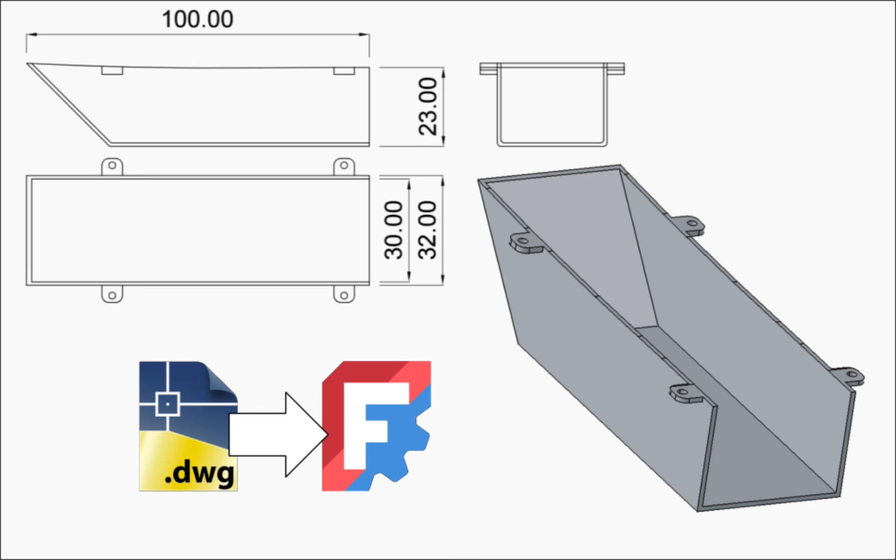You'll notice I haven't used attachment, only placement. I haven't even attached to the base planes of the body. It's advisable to use attachment, so you can reference the body's origin planes rather than faces of other geometry when using operations like patterning. But this is a quick way to get from a flat 2D imported file to a 3D print.

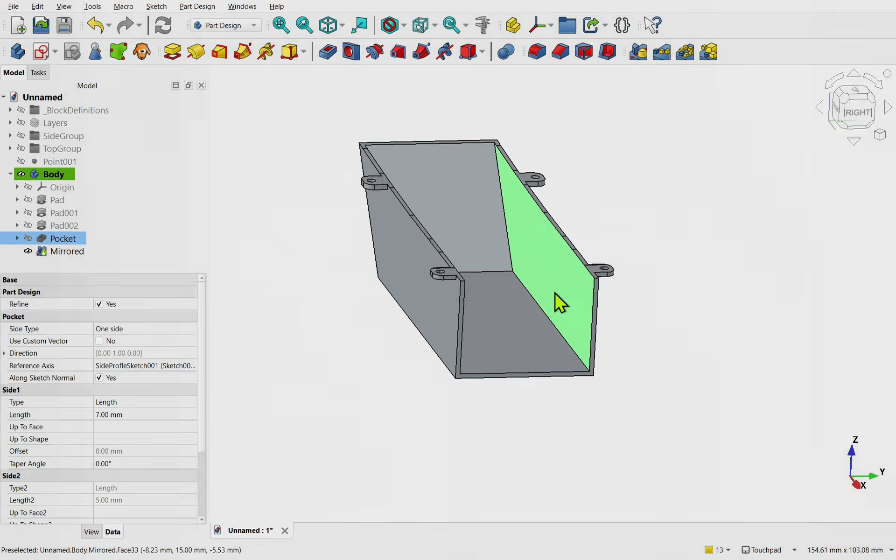Our design intent is to create a servo cover with the following dimensions using the supplied DWG file. We could create the shape from scratch using a sketch, but the curvature of the top closely matches the wing's profile that the servo is going to be attached to. Because of this, and as an exercise, I'm going to use the existing geometry from the DWG file.

First, we need to set up FreeCAD to allow DWG file imports. You can follow the instructions from the previous video or by following the link below. Once that's done, we go into FreeCAD and open a new document.

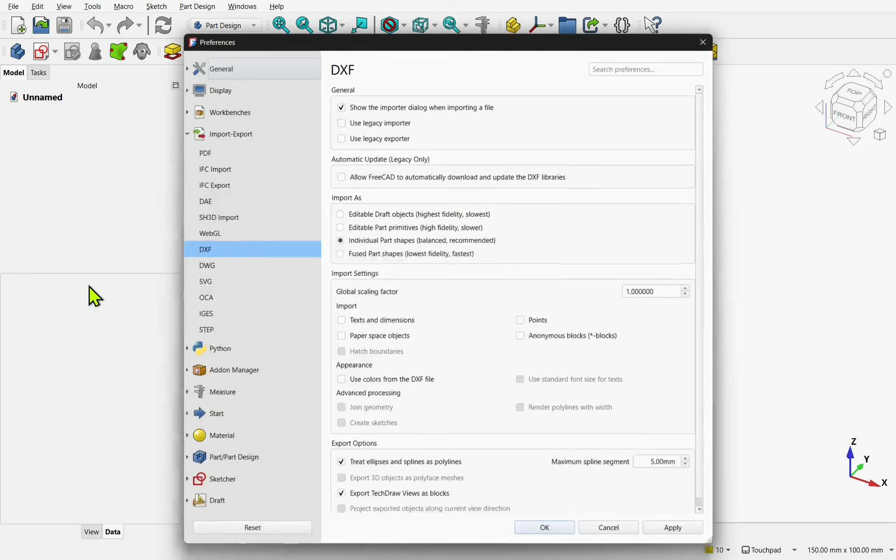To start with, it doesn't matter which workbench we're in. We're going to import the DWG file using File and Import. But it's best first to check our preferences: Edit, Preferences, and look at Import Export and the DWG settings. We've got our path and the DXF, and we're looking at the scaling factor. Mine's set to 1 at the moment. We don't know what scale this file is in.

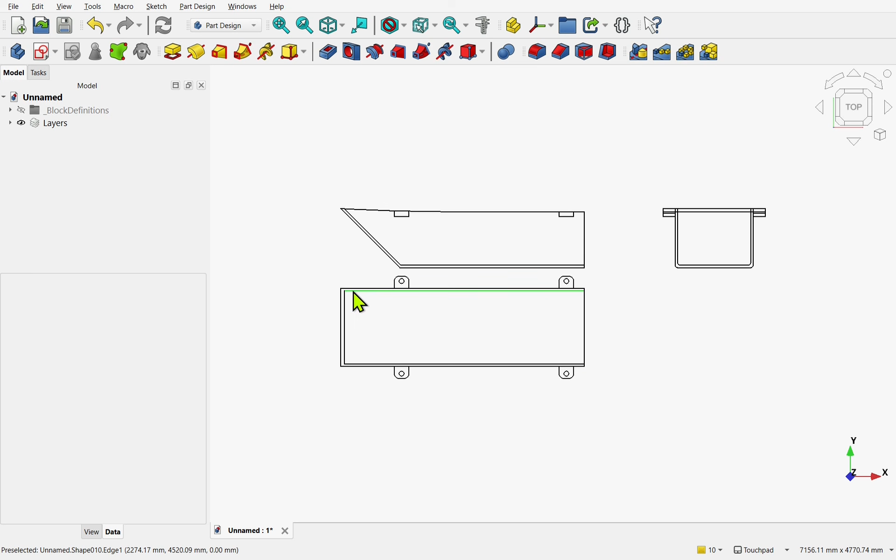Let's come up to File, Import, and pick the DWG file and hit Open. Let's set the defaults and look from the top view. I want to take a measurement off this top line. Check the scale: select the top line and use the measuring tool. Our measurements come in and we'll save that and close. So in our measurements, we've got the length here, and we'll use this value to calculate our scaling.

Calculate the scale factor: take the desired size and divide it by the current size. In our case, we'll take the desired 100mm and divide it by the current 2540.09mm, which will give us the following approximate scale factor.

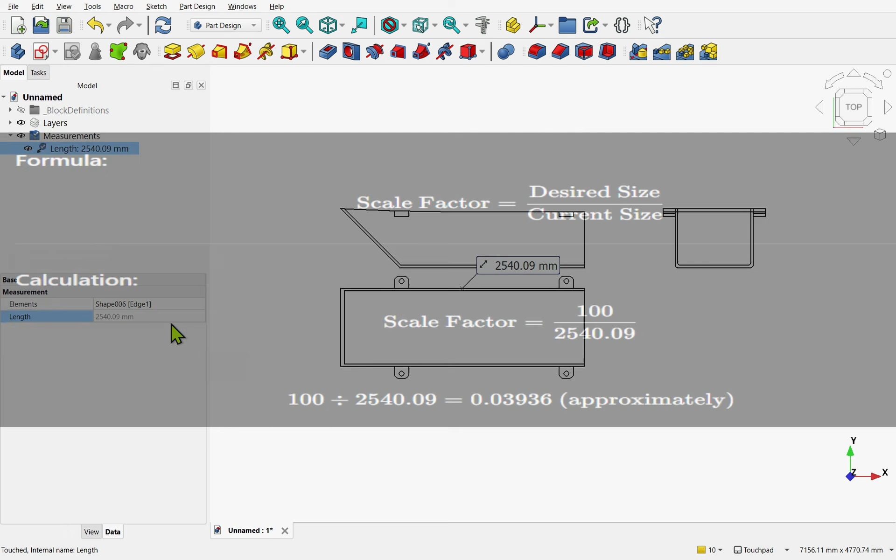Let's close the document as we don't need it anymore. Discard and come up to Edit, Preferences. Look down and find Import Export and DXF. Look at the global scaling factor, and we'll change that to the scaling we need. Then hit OK, and now create a new document.

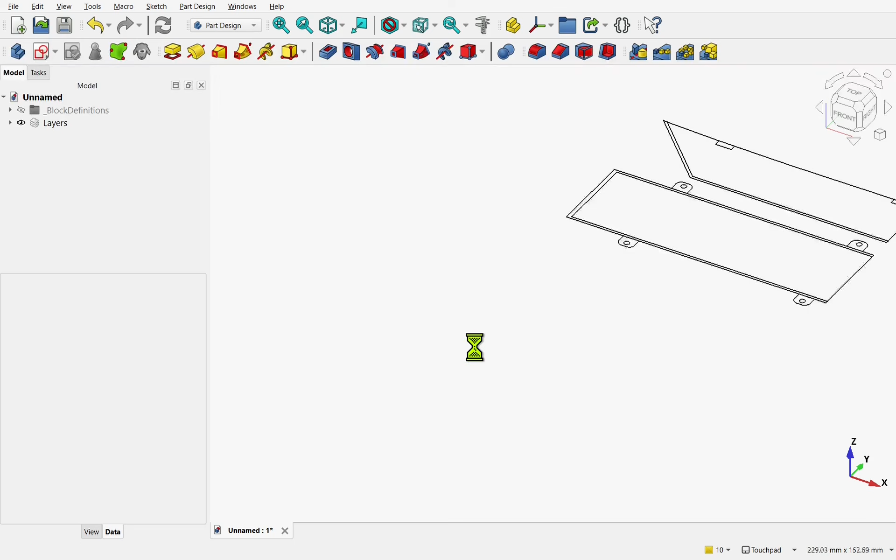Go up to File, Import, and pick the DWG file, and hit OK. Look from the top again, zoom in, and take the top line and measure it. We can see that it's 100mm. You may get an approximation, off by fractions of millimeters, but this is sufficient for your needs.

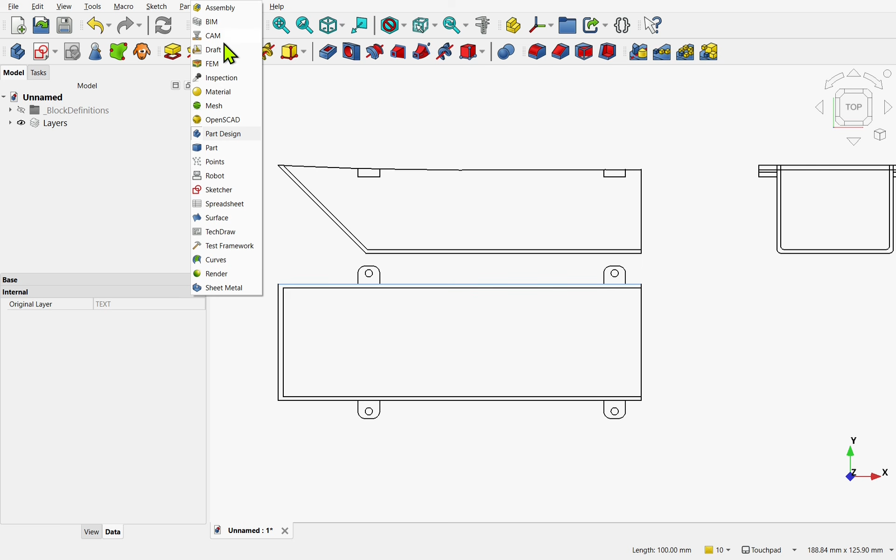Let's close out the measuring tool and come over to the draft workbench, where we'll prepare our geometry ready for the part design. Now we can examine the model to see what we have.

From the top projection, we can see it's a hollow shape with an open back. The side projection shows the curved top that we have to maintain. This is going to be part of the wall, and we see it has a closed front. Tabs are extruded downwards from the top.

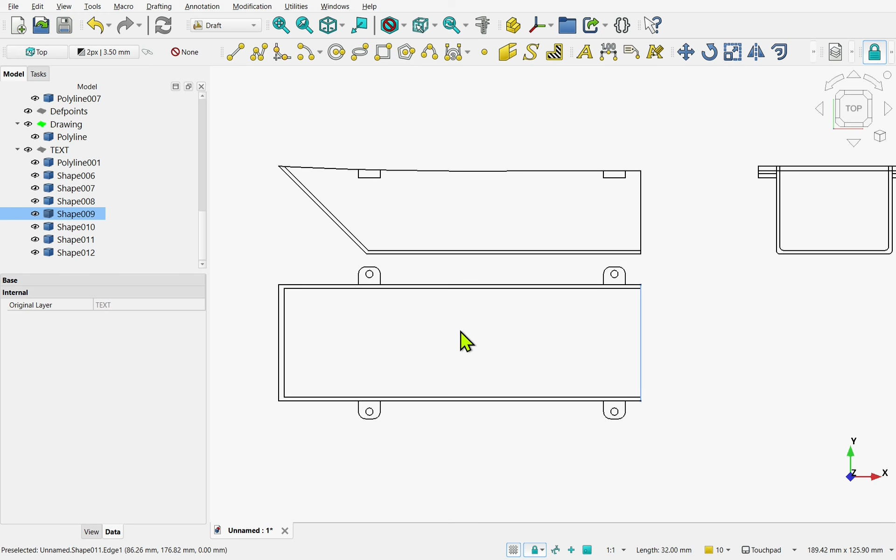From these projections, we can make a number of profiles. Let's come over to the left and see what we have. In the layers, we have a number of groups, and in here we can see a number of shapes that are part of the back view. In the others, we can see a polyline, and in text we have a number of shapes that are the top projection. We've even got a polyline in the side projection, so these are a bit jumbled.

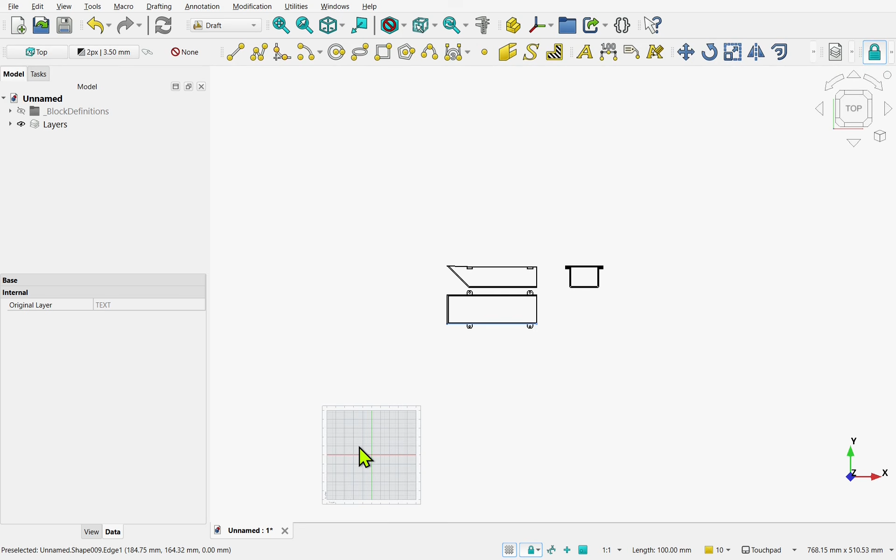What we'll do is simplify these using the draft workbench and its upgrade tools. I'm looking to upgrade these to groups of wires. We're working along the XY plane, so make sure our working plane is set. If it's not, make sure nothing's selected. Come up to Utilities and Working Plane and just set it to the top XY view.

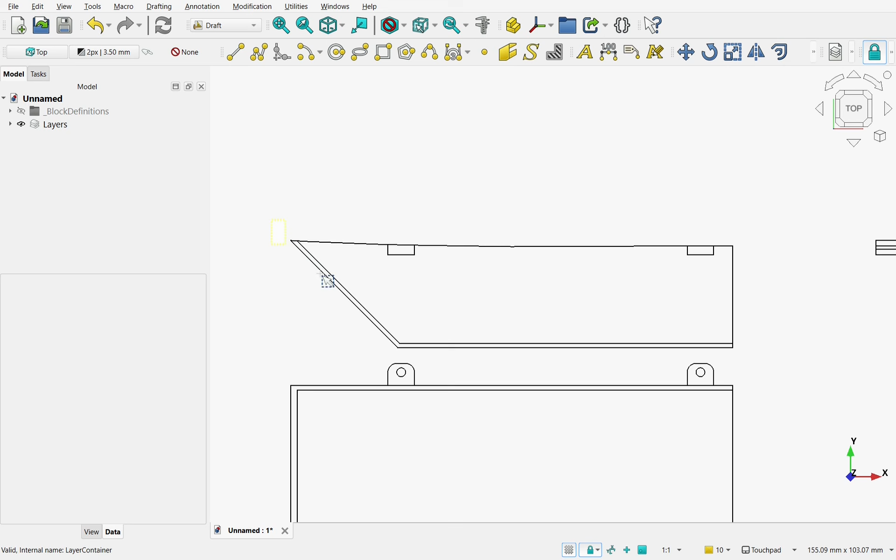Let's zoom in and first select the top line of the side profile, select once and then select again, and you can see how much is selected. So this has selected the whole line. I'm going to select all of this: come up to Edit, Box Selection, and draw a box like a rubber band around the geometry.

Let's upgrade this: come up to Modifications and Upgrade. And if we look to the left, we have a number of wires, so these are all the wires of that projection.

Let's create a group. We're looking for this icon, the group, New Group, click that, and we get a group. Now I can select the first wire, shift-select the last one to select them all, and drag the wires into the group.

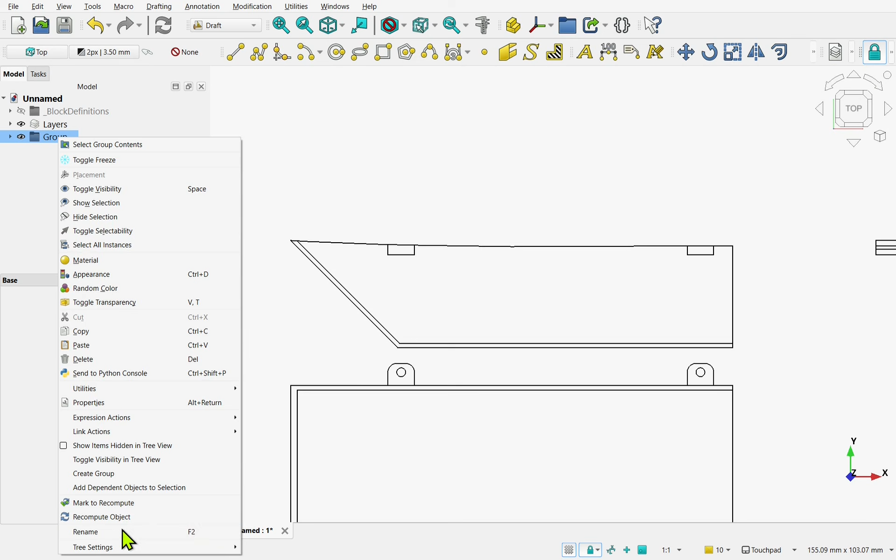This is our first group, and I'm going to call that side group. Let's create another group. This is going to be our top group. Hit enter, and we repeat the process for the top group.

Let's zoom in. Edit, box selection or shift B, then select rubber band select geometry. Up to modifications and upgrade, we get our wires, they're already selected. So we can hold down the mouse over wire 004 and drop it into the top group.

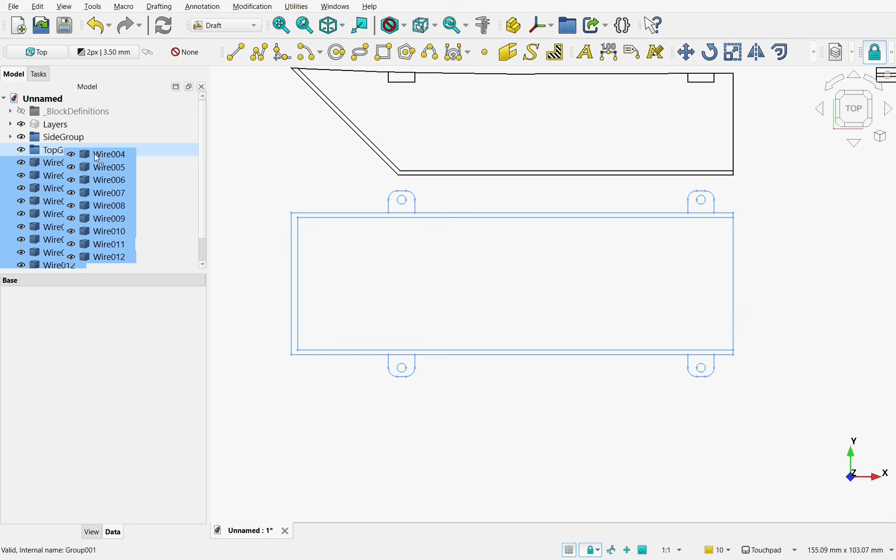I'm not worried about the back view, this one here. Let's hide the layers. Now we've got the groups, we can move this into position. So our origin, come up to view and toggle axis cross, is here.

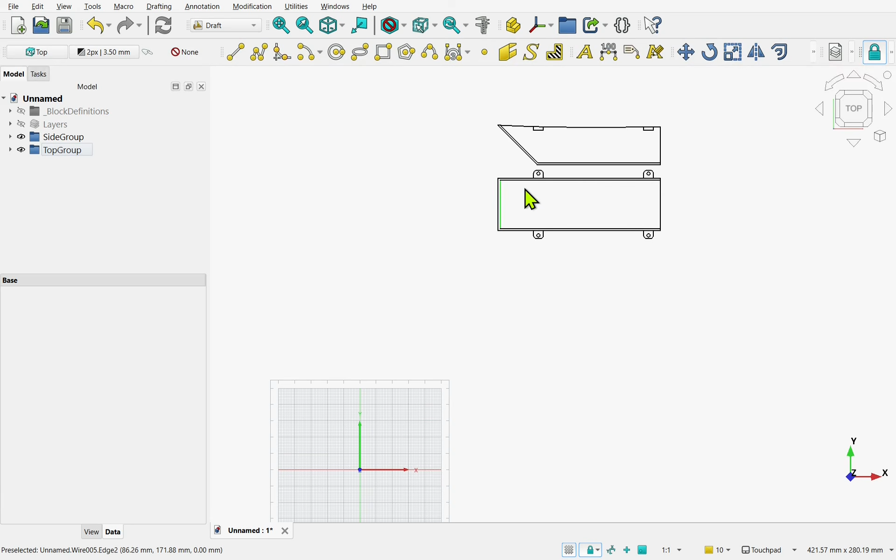This is the world origin. I'm going to move the top group over the world origin. To do that, we can select the top group and then come up to modifications and move.

Our snapping should be on, so not grayed out. We can pick the snap option by long clicking the left mouse button on the icon and selecting which ones we want. So we've got snap lock, snap endpoints, snap midpoints. I'm going to check that one. Also available up the top, and we've got them all here.

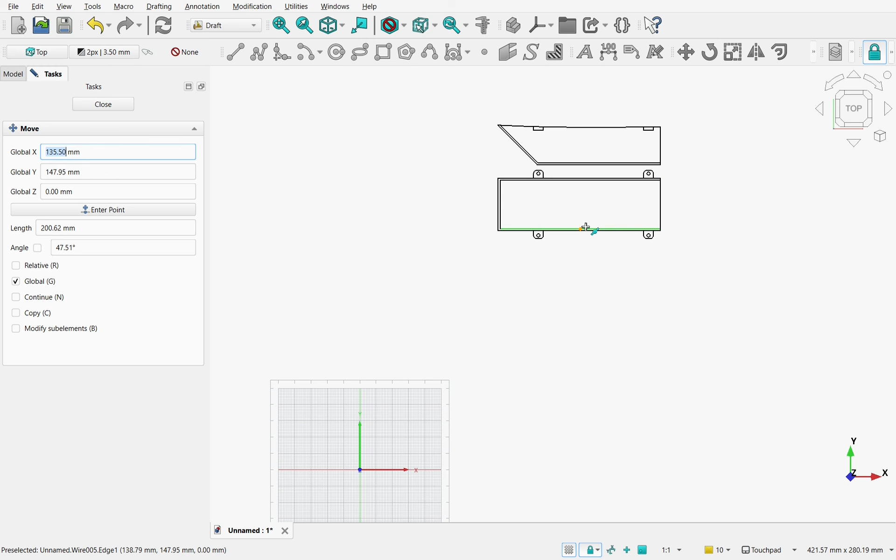This means if I hover over this object, you can see the snapping starts to appear. So we're snapping to the center, the horizontal edge here. As we pick the group, we're going to move the group. So I'm just going to select that point here, click once, then move the mouse and center it roughly over the origin.

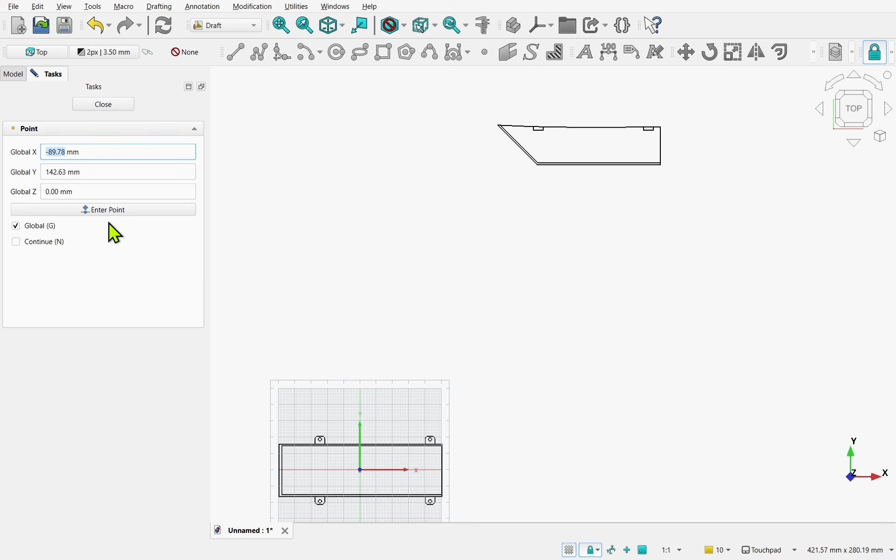Now, if you want this perfectly centered, we can add some geometry to snap to. Let's use a point. Select that, and we've got global X, Y, Z here. We'll zero all these out. Type in 0 on the keyboard, press tab, and then enter point. We've got a point at 0, 0, 0, so the center here. We zoom in

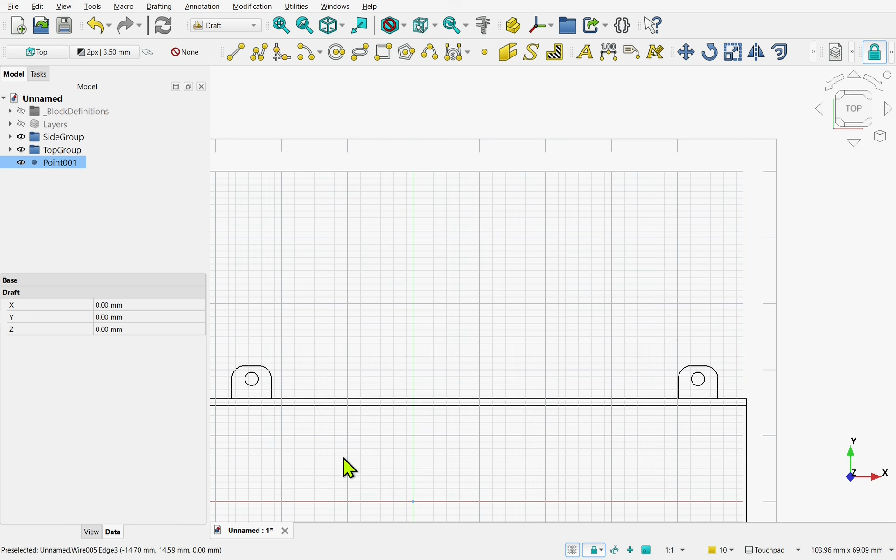and click. Let's come up to view and toggle axis cross. We should see a point here. So there's a point just here.

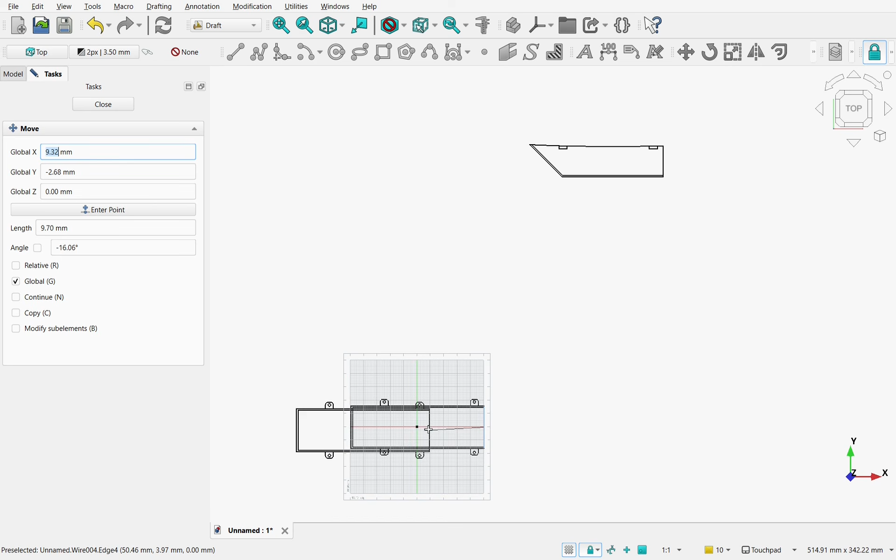With that, we can snap geometry too. So if I click on the group, top group, and use the move tool and pick, say, a snap to the center here, I can snap to that point. You can see, snapping to that point, and we can center it. So we've got the top group.

Let's do the same with the side group. Pick the side group, let's zoom out slightly. Modifications and move, or use the move tool from the toolbar. And the way I want to attach this is to attach it at this point here.

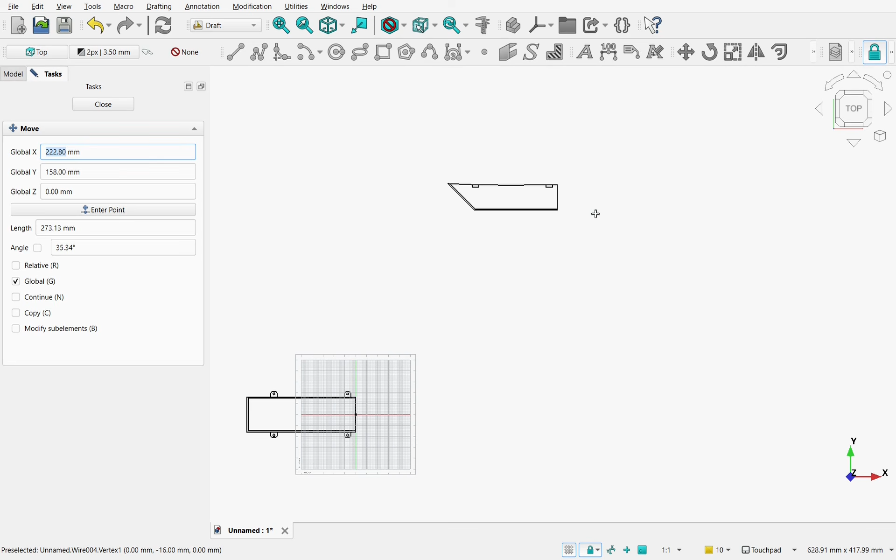And it's going to pivot from this point downwards. So that's select top right point. Click once, it's mobile. Let's zoom in and hover over this vertex here, this point. Get snap to endpoint, click again, and that's in position.

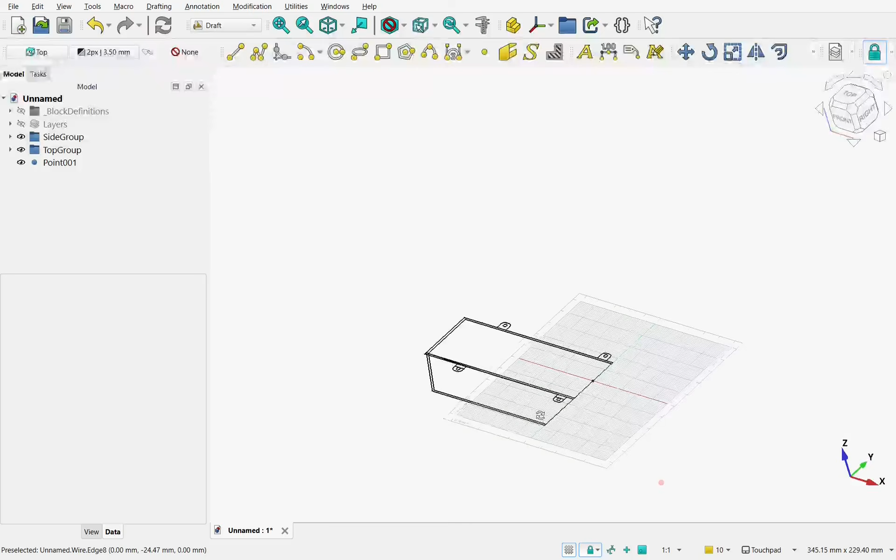So we've positioned along the XY. Our next positioning is along the YZ plane. So we need to rotate our side group. So select the side group. This time we'll come up to modifications, rotate, and it's the same process.

We need to select a point, and this is the point that's going to be rotated from. It's going to be this point here. Hover over that, we can see the snap endpoint. Click once, we get a line. This is where we're going to drag geometry from, and we'll drag it from this point.

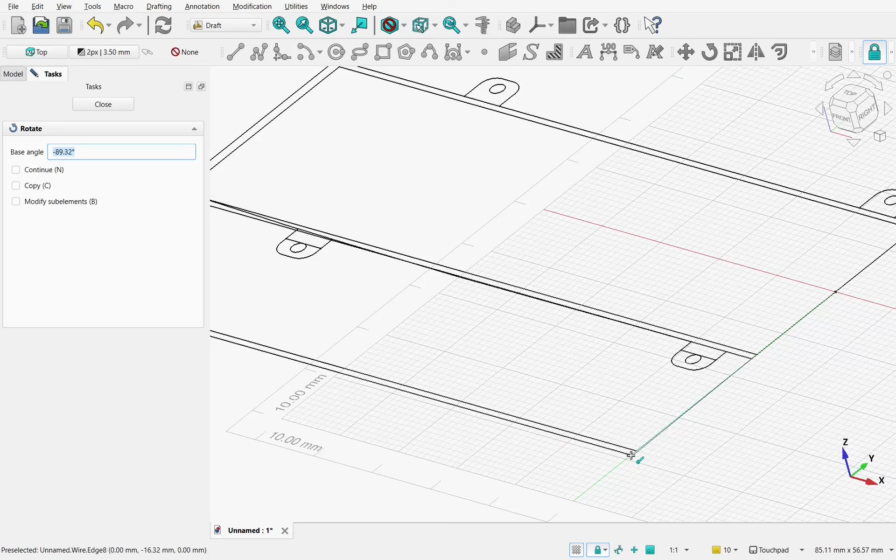Now, one thing that we haven't done is set the plane, so you can see I'm moving along the wrong plane. I'm going to hit escape to cancel. Make sure nothing's selected. Up to utilities, and working plane. We're set to the YZ plane, the side plane.

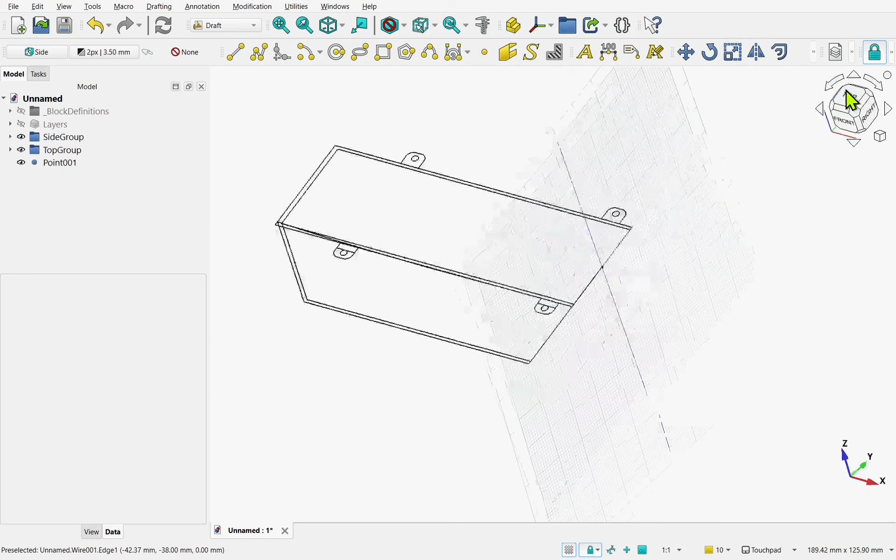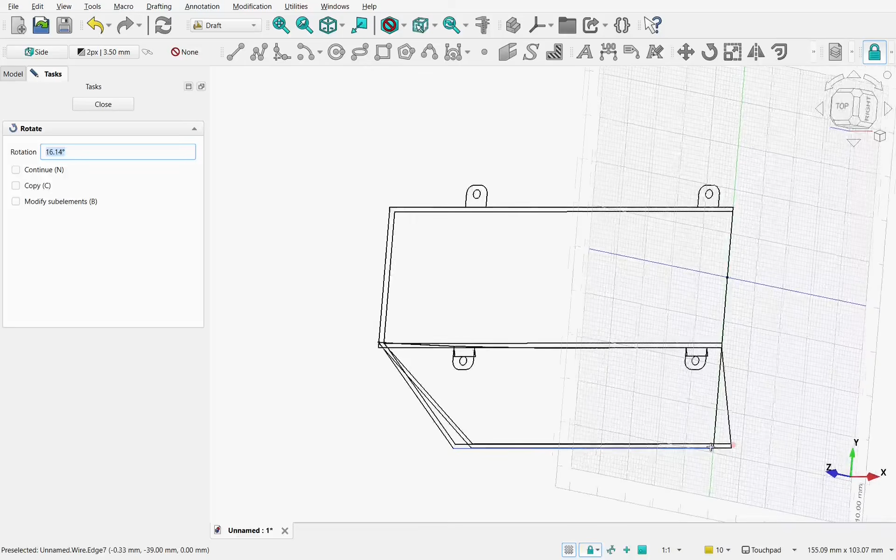So now we can look from the top and we see the plane has moved. Place a little bit of angle, select the side group, use the rotate tool, select the first point, going to be this point here. Select the next point that's going to be dragged from, and then we can rotate our 3D view. Let's rotate it around this way.

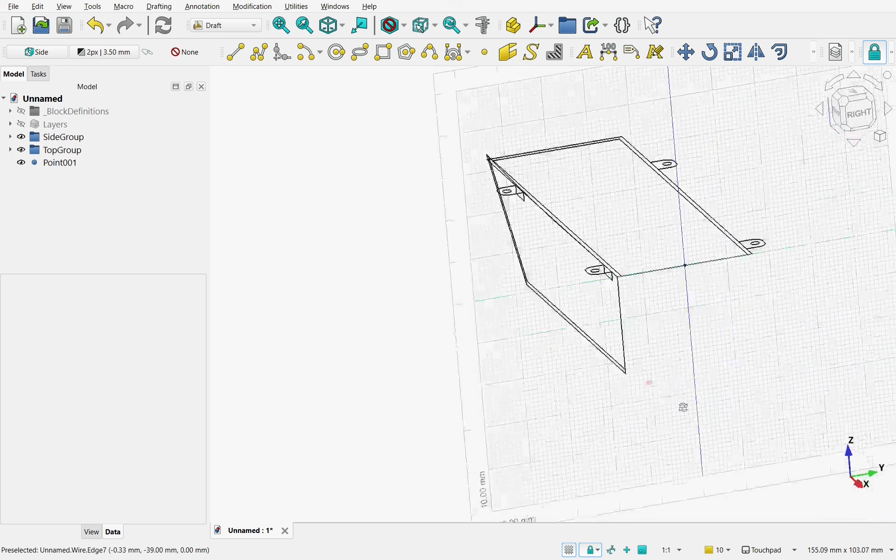Sometimes you can get yourself quite disoriented. Let's come around here, always look at your Y and Z, make sure we're rotated correctly, and look at the rotation, rotating downwards. We need to type in 90 degrees on the keyboard, and you see on the left it's entered into the field, and hit enter. So now we've positioned both the top and side projections, ready to utilize them in the part design.

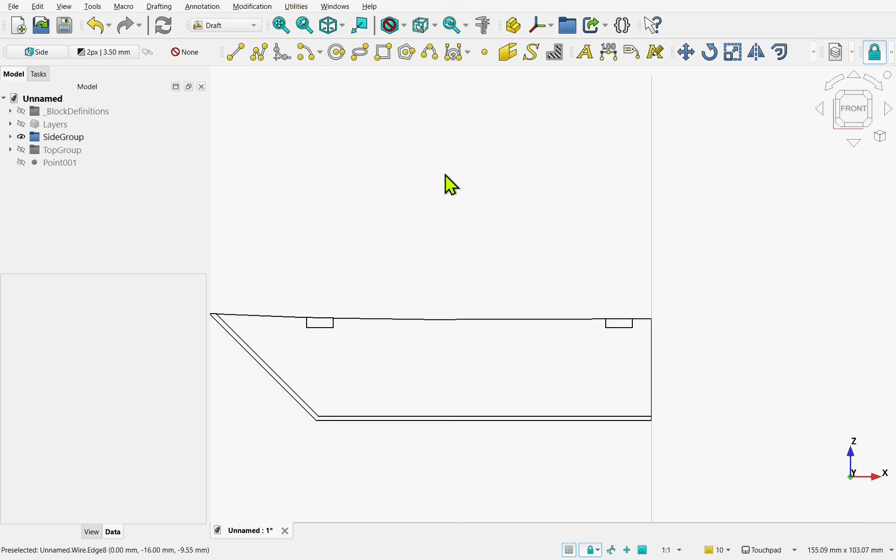Before we go ahead and use these in the part design, we first need to make a number of sketches. I'm going to hide the top group and also the point. If we look at the front from the side group and change our working plane, ensure nothing's selected, go to Utilities, Working Plane, and set it to the XZ plane. We can now work on the side geometry.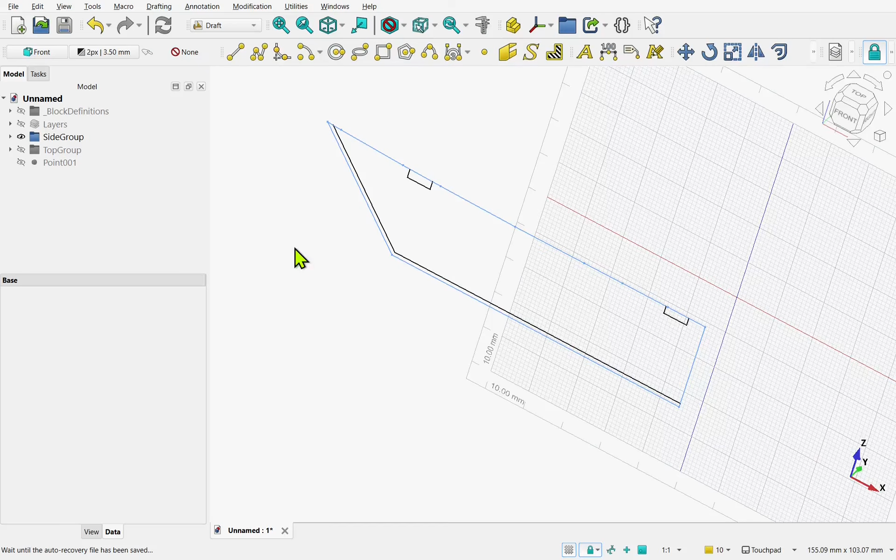So we first need to create an extrusion of this geometry here, and we'll come up to modifications and draft to sketch. We created a sketch and we'll rename that to side profile sketch. We'll just hide the sketch.

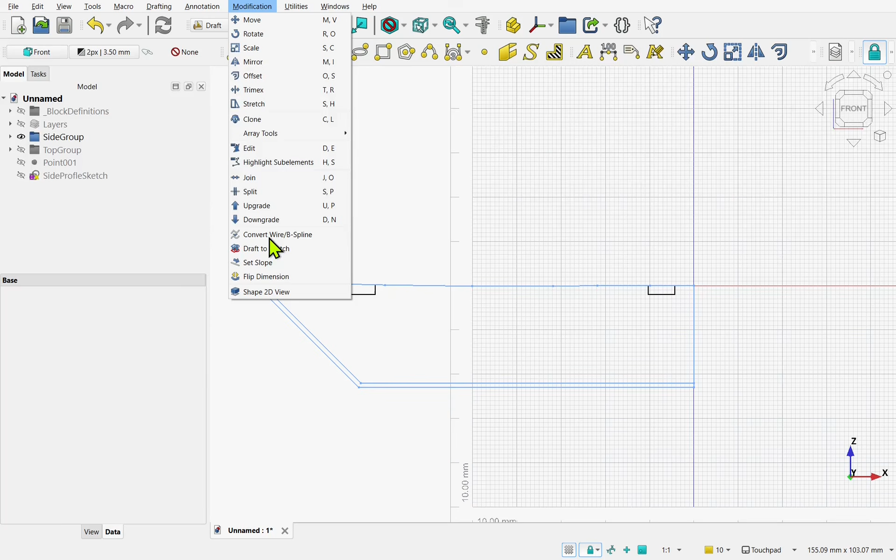Now we need the inner profile. For that, take this geometry and also this geometry within here as well. I'm going to use the box selection, edit, box selection, and we'll select all that geometry we need. We're missing the tabs here, and we'll come out to modifications and draft to sketch. This one's going to be the inner profile.

Let's hide the side geometry and double click on the inner profile sketch. This geometry we don't need in here, which includes this curve at the top and also this line. We have a red point here, and this point isn't red, so it's not connected to anything. We can see this line goes down here, so we need to trim this line away. At the moment, pulling it out, it's not connected, and we haven't got a closing edge here.

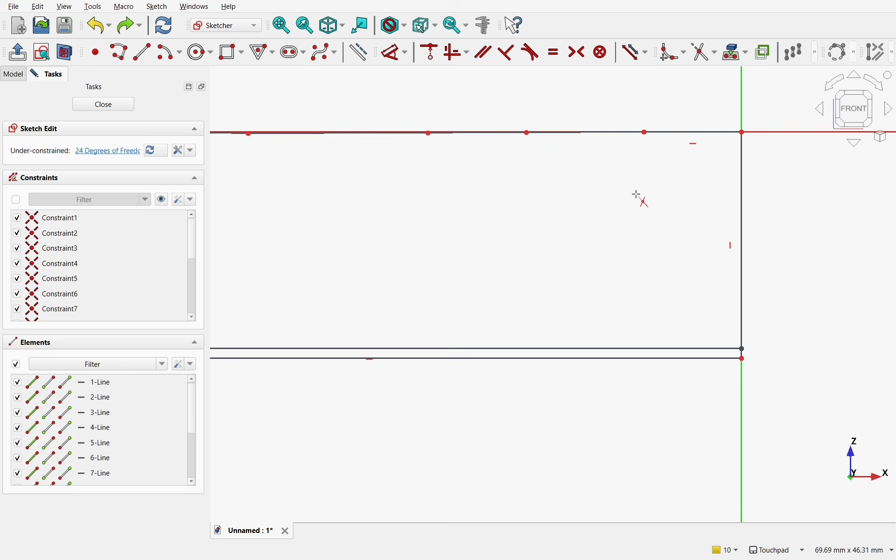Hit Ctrl Z on the keyboard. I'm going to use the trim tool, or right click, trim edge. We'll trim off this edge, so we've got connection now. Let's move over to the left hand side and do the same here, trim this edge as well. So you can see these are red. If these aren't red, right click to cancel.

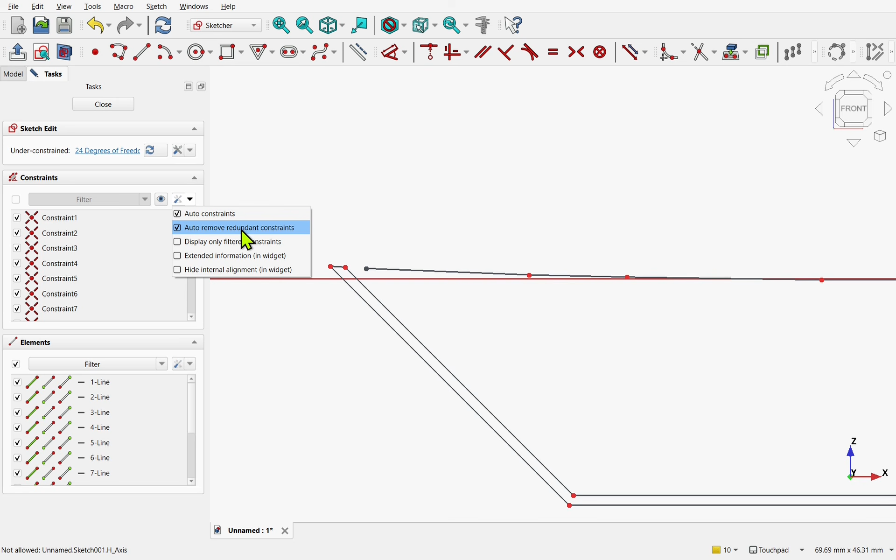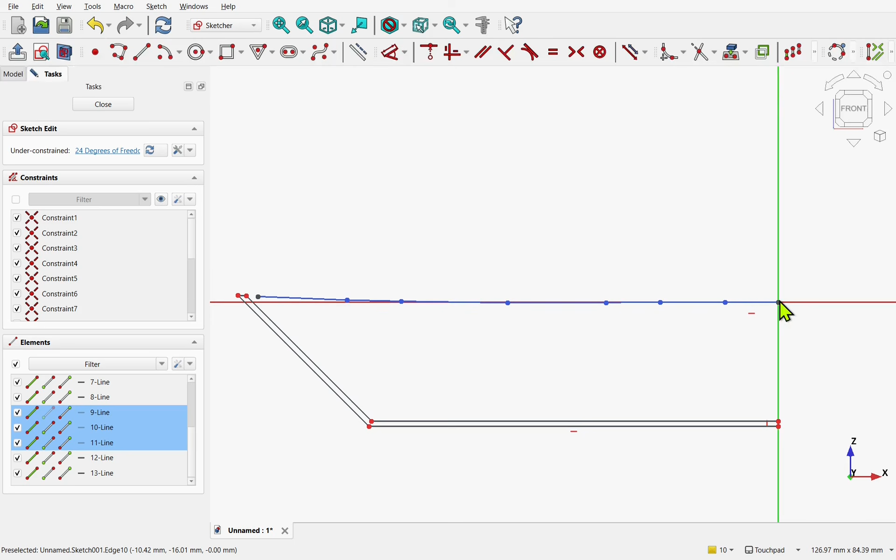Make sure we have auto remove redundant constraints on, and we highlight the points that are on top of each other, then add a coincident constraint, or hit C on the keyboard. So now I can start to remove this geometry here as we don't need it. I've rubber band selected those - if I do it in reverse, it actually selects anything I've touched. Let's hit delete on the keyboard and close.

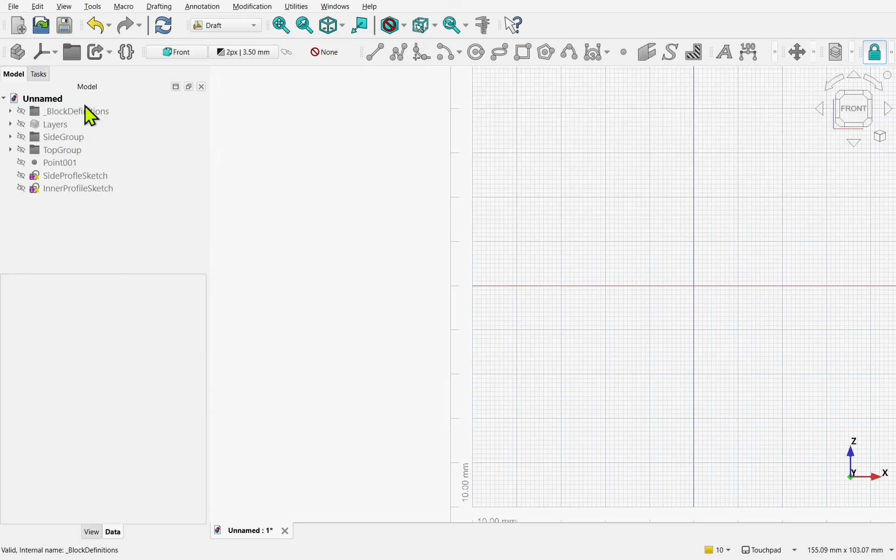So now we've got the inner profile. Check our side profile - everything's connected. Come over to the tree view and hide the inner profile out of the way, and close. We've got the two profiles, and now we want the tabs.

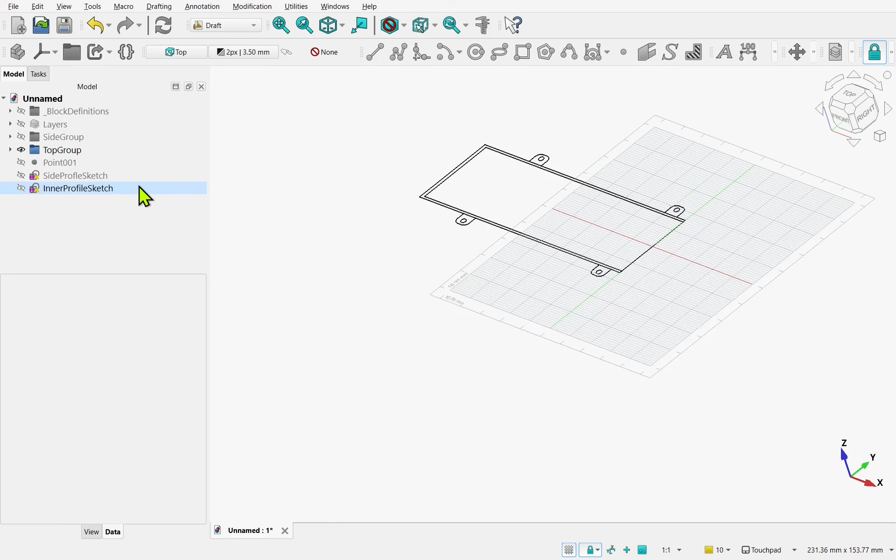Let's hide the side sketch and the inner profile and look at the top group. Pan the view around and make sure nothing's selected. Come up to Utilities and set the working plane to top view. I always like to match the working plane to the one that I'm working on, so if we had to make any amendments, we're already on the correct plane.

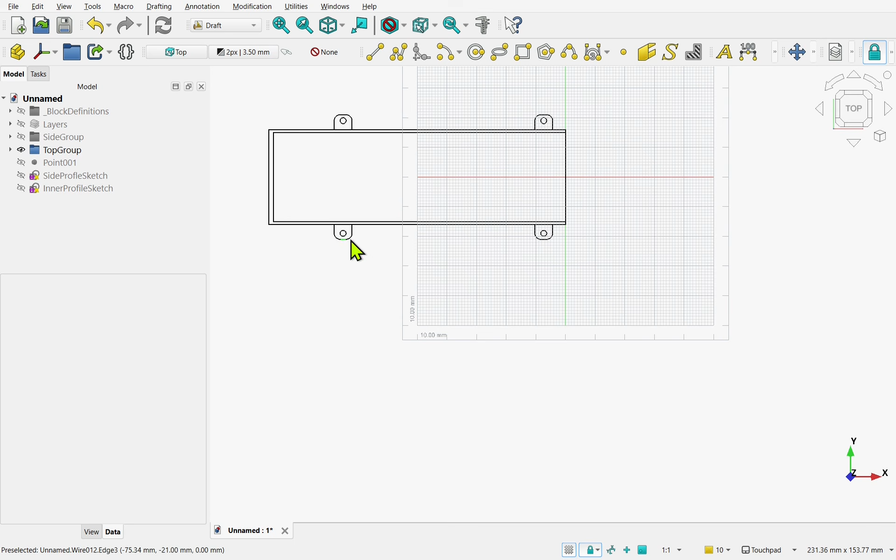I want to isolate two of these tabs. I'm not going to isolate four of them because the subject is symmetric. So we'll add all the way up to the center line, create the tabs, then mirror the features over the center. Let's zoom in. I want to edit, box selection.

We'll box select the tabs. Modifications, draft a sketch, right click and rename, and call this Top Tabs Sketch.

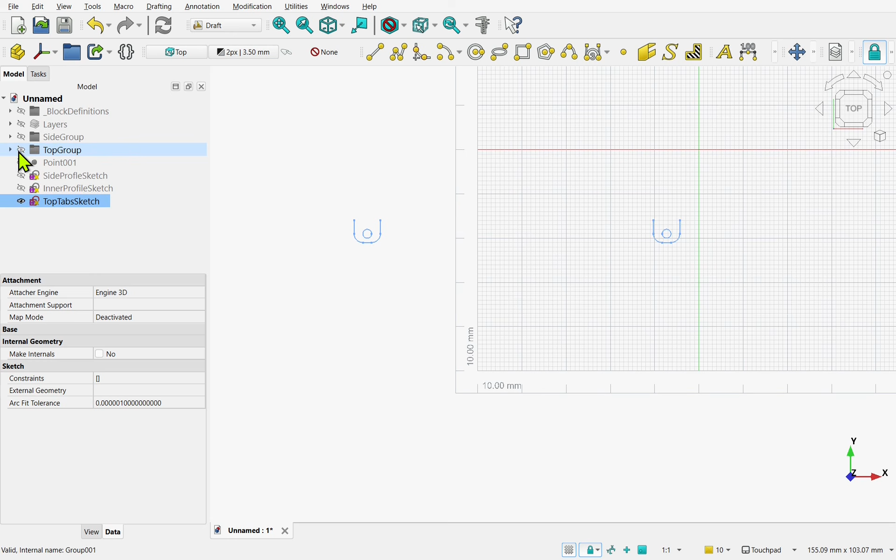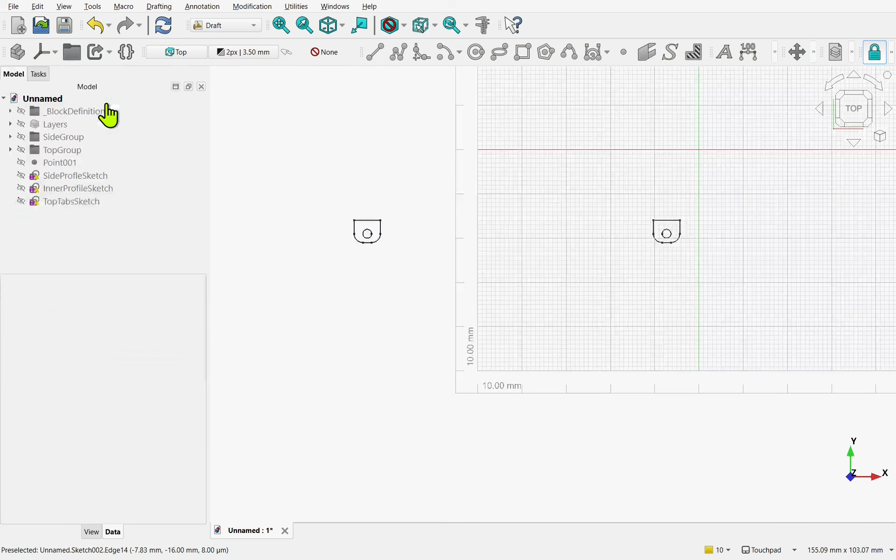Let's hide the top group, and we can see we need to close this geometry. We've got open wire at the moment. Let's double click on the Top Tab Sketch and use a simple line, connect up one side, then hover over the other side with coincident, and do the same for the upper tab. It's all closed. Let's hit close, and now we're ready to move over to the part design workbench.

Let's open up the part design. Look at the tree view. We'll hide top tabs and make sure nothing's selected, and create a body.

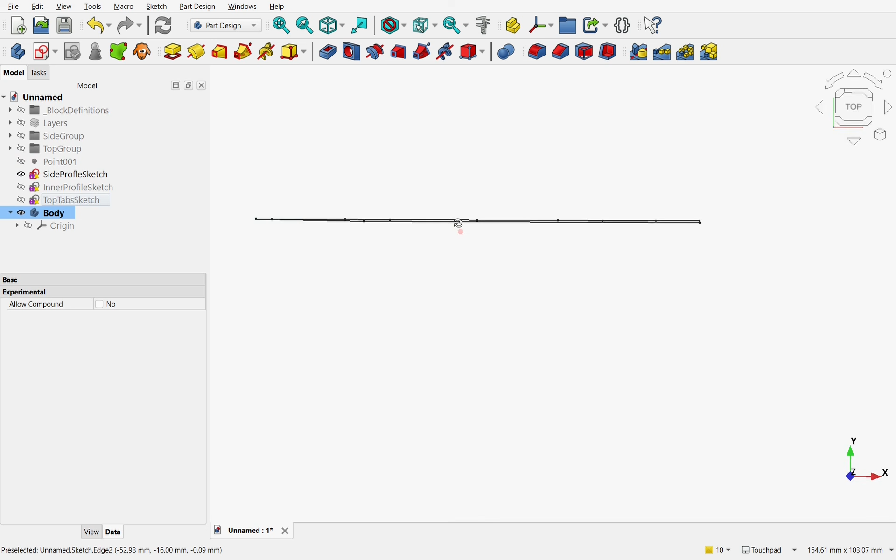Let's deal with the side profile first. This is on the XZ plane. Take the side profile, click and drag it into the body. This isn't attached to anything at the moment. If we look at the origin and click on the eye to show it, we can see the origin is here.

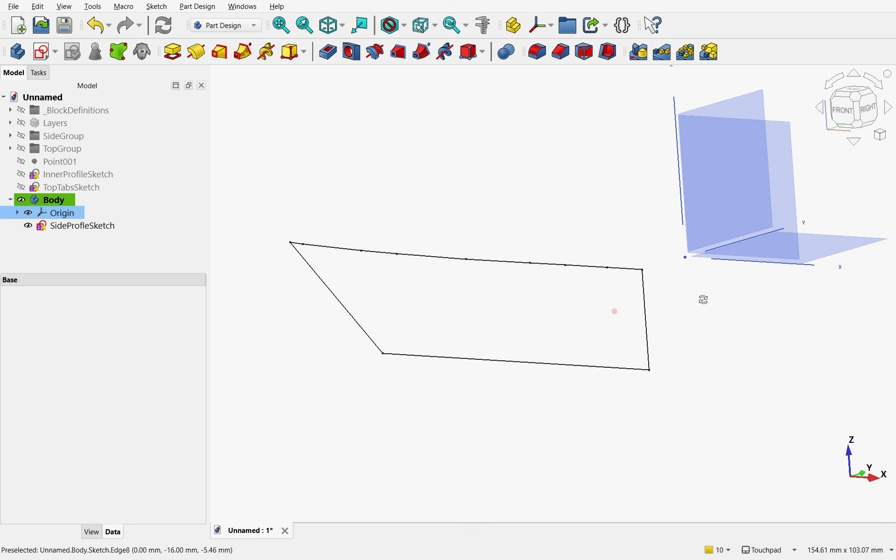We can attach it if we want, but I'm going to leave it unattached. Let's hide the origin - this makes it a lot easier as we don't have to alter placement. Click the side profile, so the side profile will pad. Let's just show the top group, and this will give us some idea of how far we're going to pad the side profile.

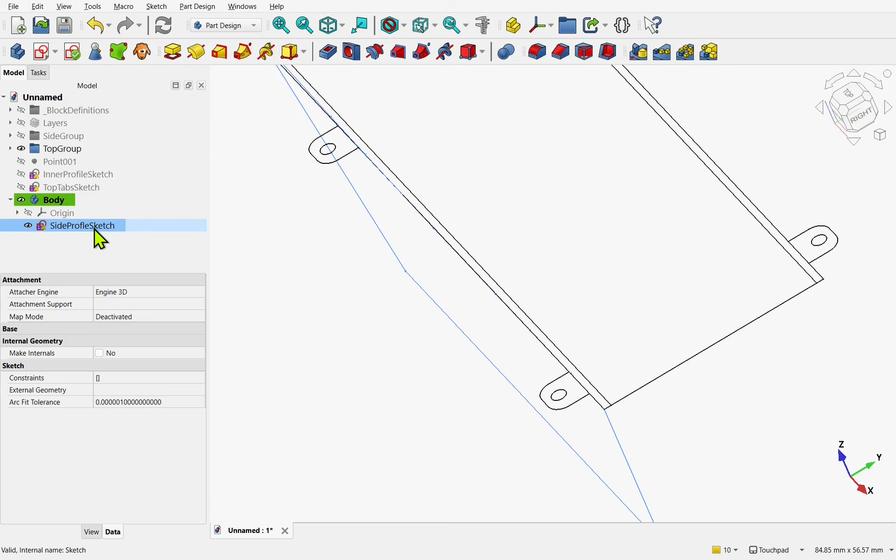Select the side profile, use the pad. It's padding in the wrong direction. Let's hit reverse and set the length to 1 mm and click off.

Got the right length, hit OK. Look, the profile has been padded, and we can move on to the next feature.

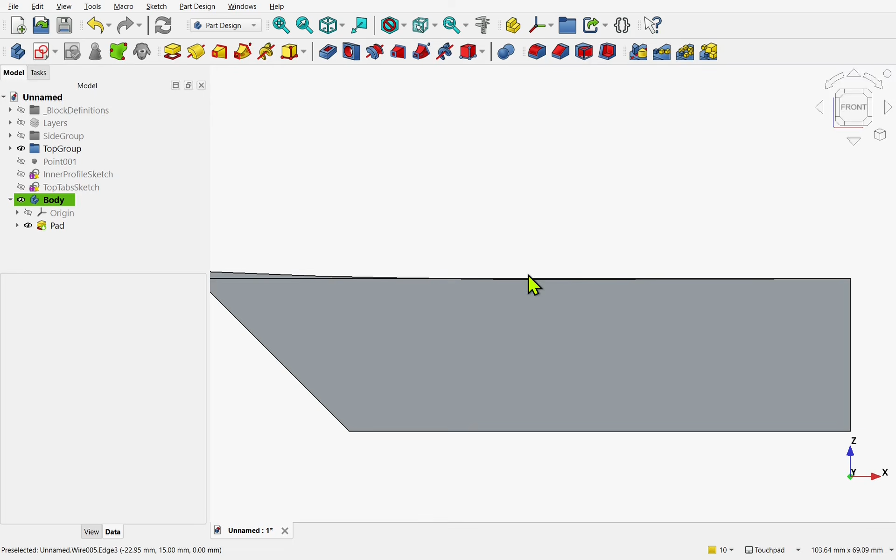Next feature is the inner profile. Let's show that. We can see it sitting there, on this side, but that's fine. Just pad it this way. Take the inner profile, click and drag it inside the body.

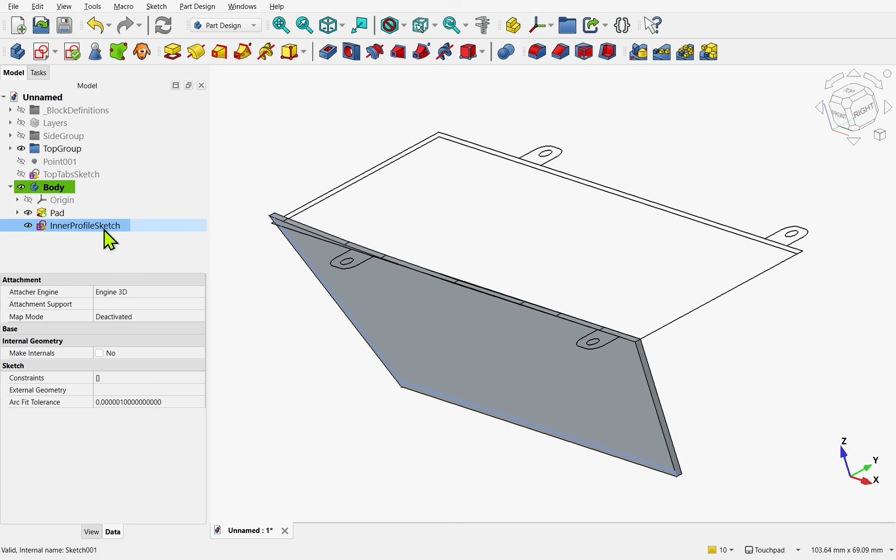Select the inner profile and use the pad in the reverse direction. We don't want to pad it all the way up to this edge, but we want to take half of it because we're going to use symmetry to our advantage.

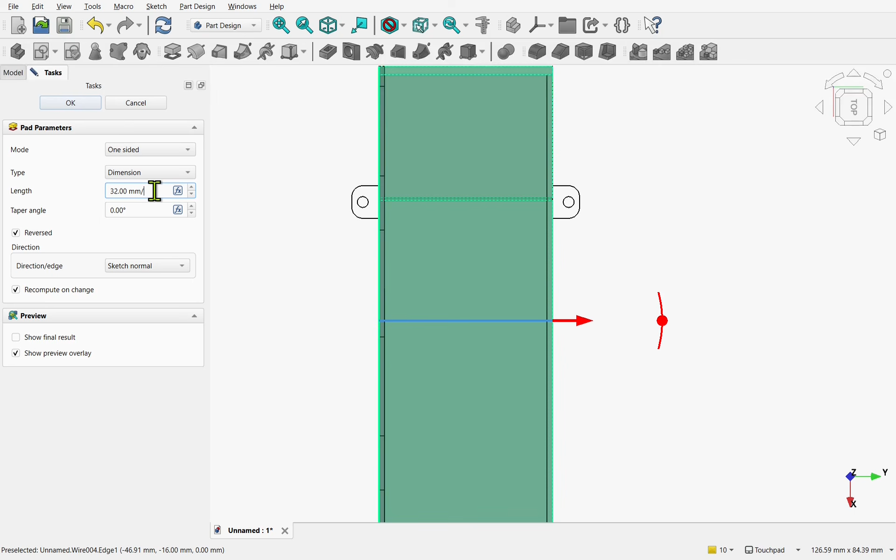Let's have a look at the top. So we're looking at 32. We'll just divide that by 2 and click off. Padded halfway, 16 mm, and hit OK.

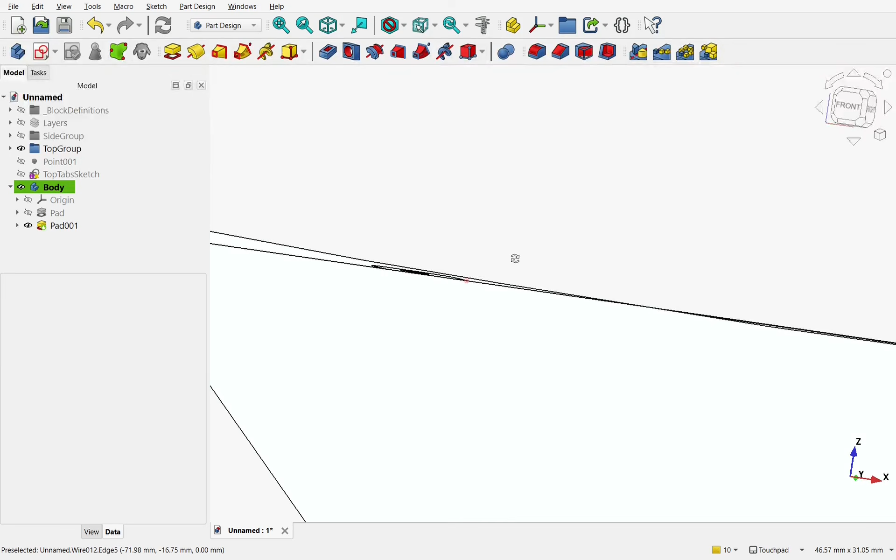Next are our tabs, but we can see a small issue. If we create the tabs, they're not going to be aligned with this surface here because of the curve, though the other one will be. We can use the sketch of the side profile to form the tabs into the shape we need.

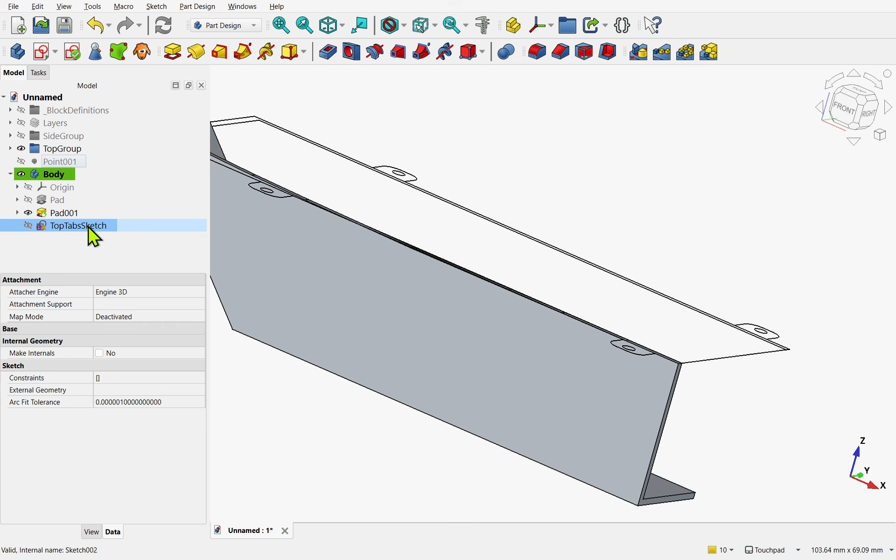Let's take the top tabs and drop them inside the body. We're going to pad the tabs in 2 directions. Take the top tab, create the pad. Movement is going upwards, type of dimension, and the mode, go for 2-sided.

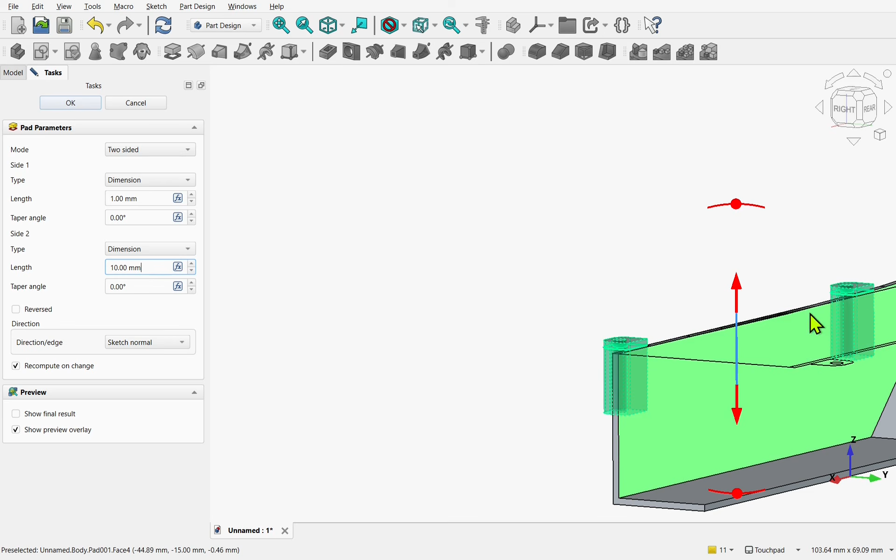So our first length, let's set this to 1. That's the top. You can see I'm going to get an overhang here, this edge. So we've set the length on the other side to 10. And hit OK.

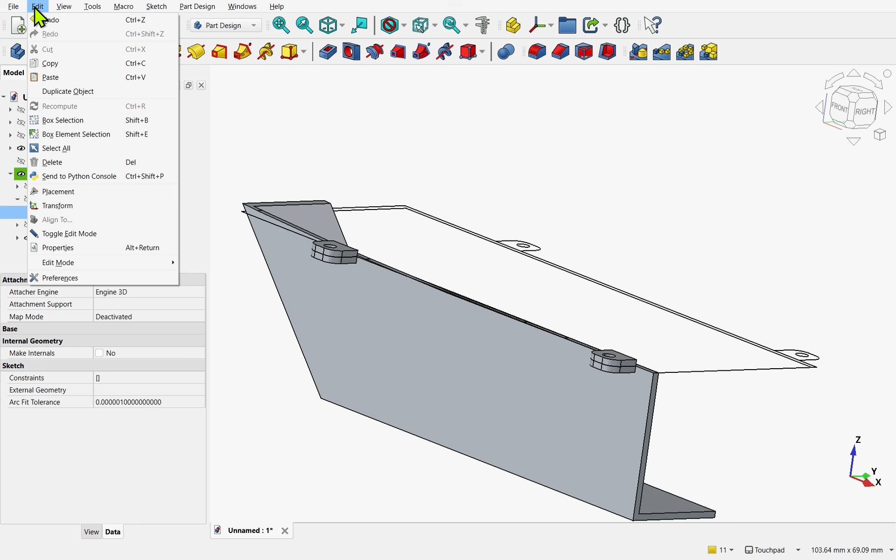Now we've got those in place, what we can do is look back at our first pad and look at the side profile sketch and show that. Come out to Edit and Duplicate Object. Our sketch is duplicated. We double click on it. We have the profile, you can see it in there.

Let's come over to the model and just hide the pad. You can see the profile there. And also hide the top group.

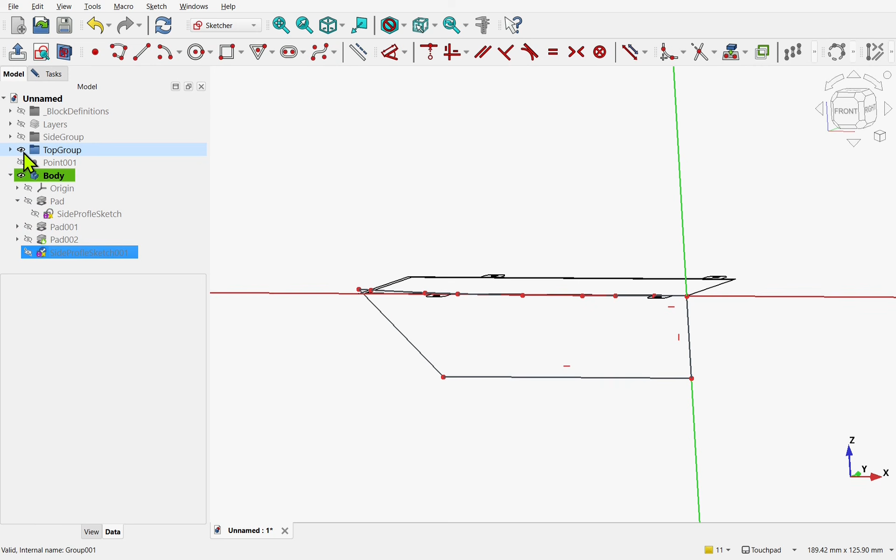Let's create a rectangle around all of this geometry. So we've created basically a cookie cutter. When we create a pocket, it will remove material in this area.

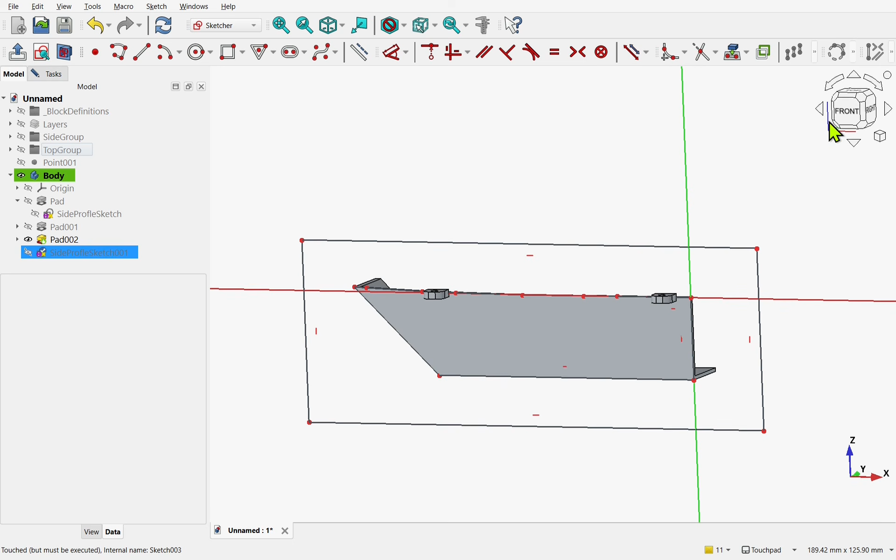So if we go back to our pad and show it and look from the front, it will profile this tab to the right curvature and also remove the unneeded material for this tab.

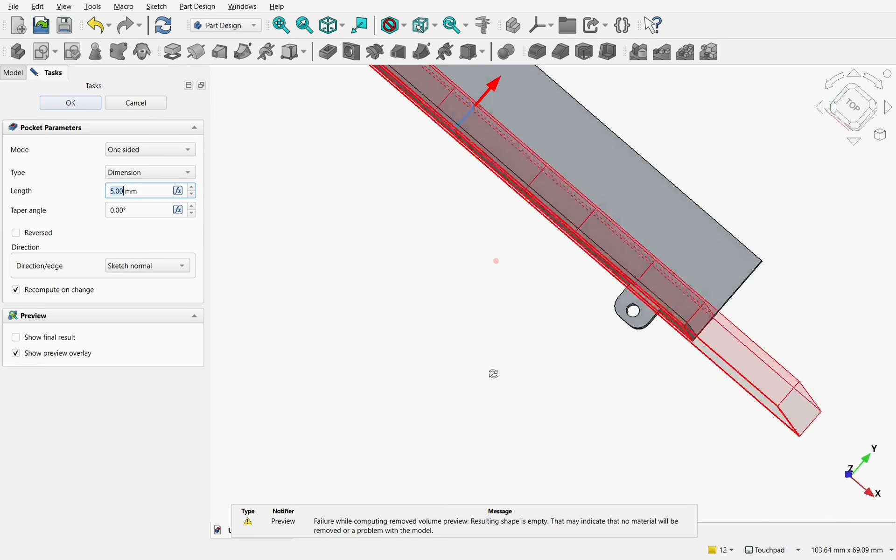Go to task and hit close, and then take the sketch and create a pocket. Make sure it's going in the right direction. So at the moment, if we look from the top, it needs to go in the reverse direction. Make sure we have enough clearance and hit OK.

That's cleaned up that edge now, and we've got the curvature we need on this tab.

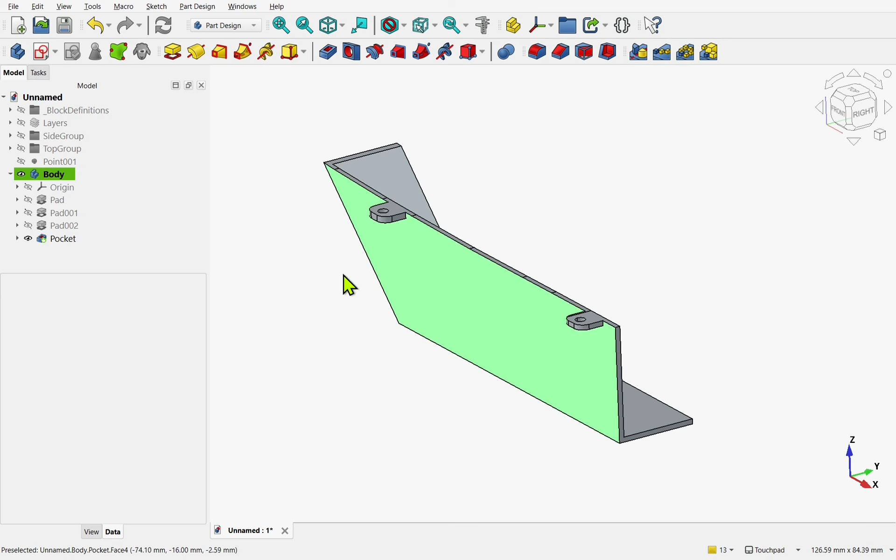We now need to mirror this. To do that, we'll use the mirror tool. We take the body and use the mirror tool. We can see we've got some odd results. Transformation doesn't really look right. So we need to transform the tool shapes.

The plane I'm going to use, I'm going to drop this down and hit select reference. And we'll select this face here as reference.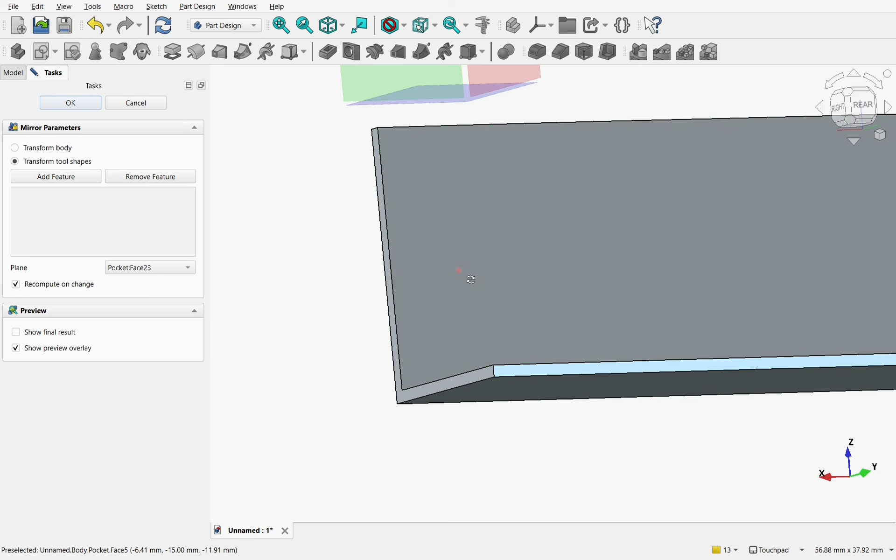Next, let's click add feature. This is where having the split model and task view works in your favor. Then pick the pad. The pad has been added. We have to return to the task, add another feature, and then work our way down the next pad.

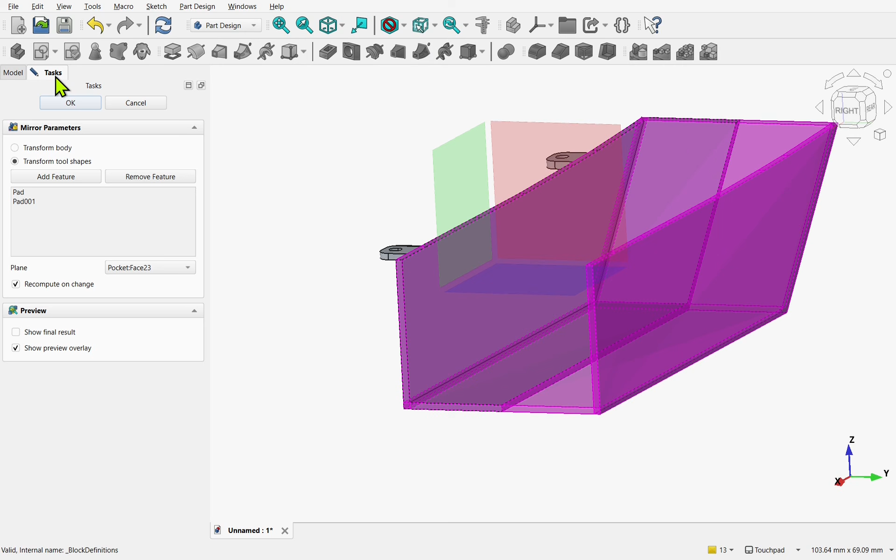Add another one, add two, add our last feature, which is the pocket.

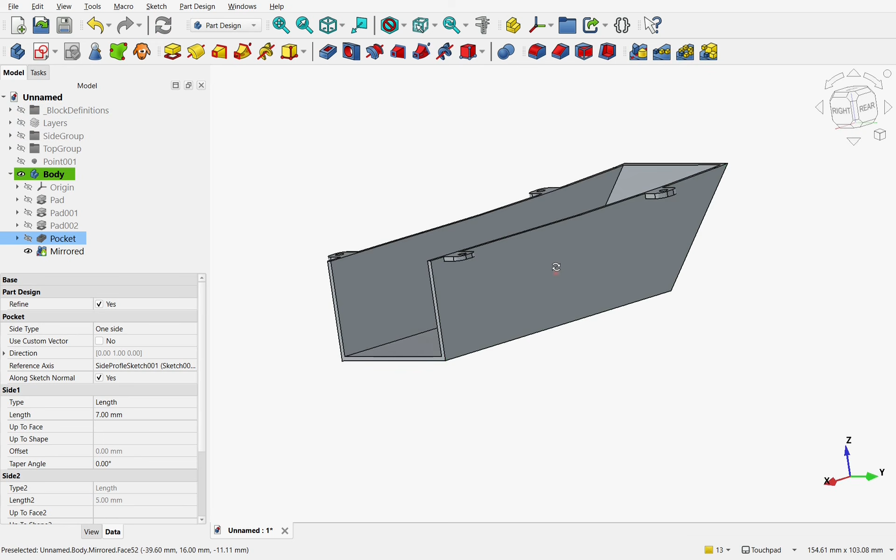Now let's come over to tasks and uncheck the preview overlay and show final result. Then hit OK. We now have our final result created from the DWG file, and we're ready to 3D print.

Export, just click on the body, go to File, and then Export.

So that's it. That's from an imported file to a final part design model using the draft workbench, converted the imported geometry to wires, and then finally to sketches.